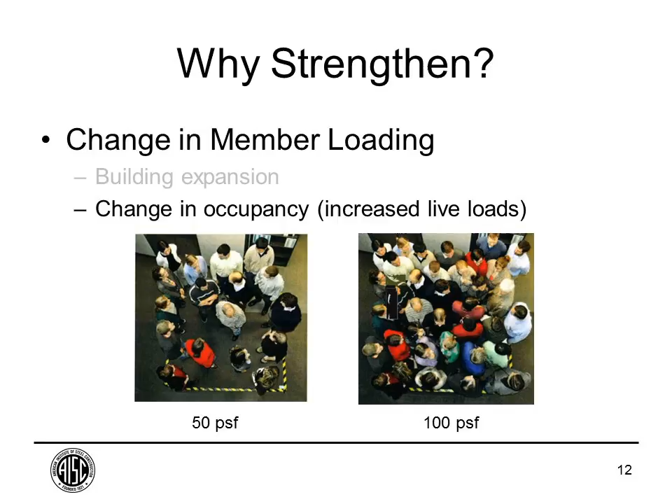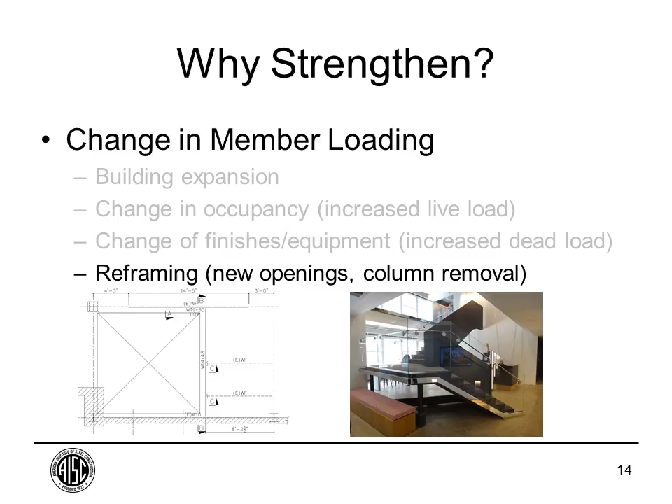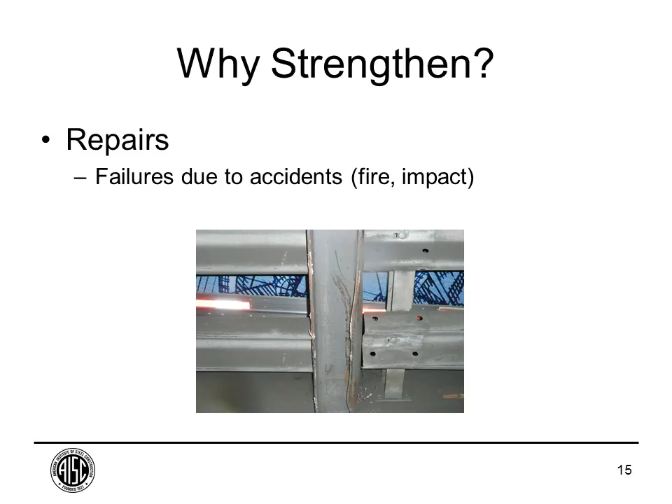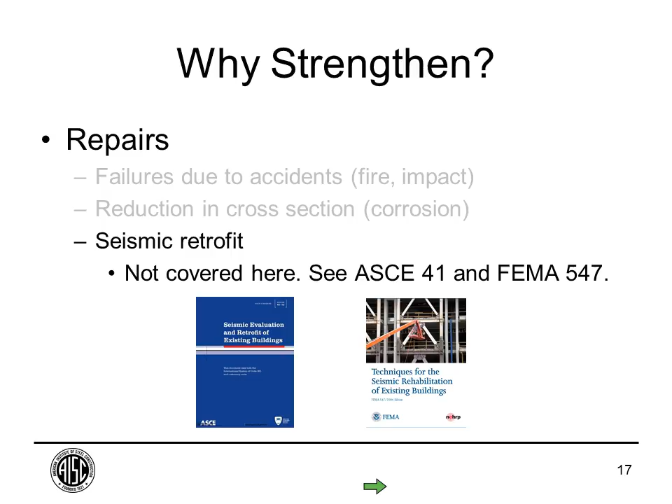And then a whole other category of strengthening would be seismic retrofit. I'm not going to have time to cover that topic here today, but many of the theories and the design provisions that I'll go over can be used and applied to a seismic retrofit as well. I've listed here two references that cover that material, ASCE 41 and FEMA 547.

So I'll talk just briefly about the International Existing Building Code, which is a code that is governing in a lot of places in the United States, and a few sections that pertain specifically to strengthening of existing gravity members. The IEBC classifies work into three categories: repairs, additions, and alterations, which are subdivided into three different work classes depending on the scope of work.

For repairs less than substantial structural damage, the damaged elements shall be permitted to be restored to their pre-damaged condition. Substantial structural damage is defined as vertical elements of a lateral system that are reduced by more than 33%, or vertical gravity members that support 30% of the building and are reduced by more than 20%. So even though something like this may look like substantial structural damage, vertical load-carrying members such as columns that are substantially damaged would fall under that category. The IEBC therefore would allow you to just restore the original size of this member when performing repairs.

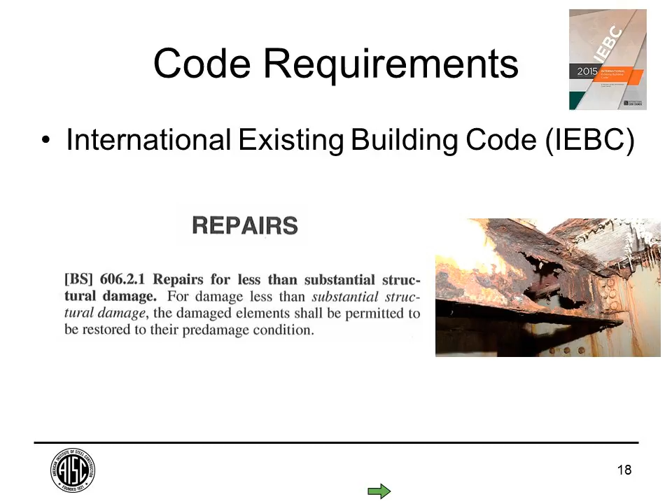Now, it's always a good idea to understand why the member failed in the first place, and make sure that your repair is addressing the cause of the original failure where appropriate. So for example, if this beam is getting wet, causing the corrosion, you would want to make sure that your repair design prevents that from happening again.

Another category of work in the IEBC is additions, which is defined as an increase in floor area, number of stories, or height of a building or structure. The code says that the existing structural elements supporting any additional gravity load as a result of additions shall comply with the International Building Code. But there's one exception: structural elements whose stress is not increased by more than 5% don't have to meet this requirement. So when you're looking at a member that is affected by your addition, if the load to that member is increasing by less than 5%, then you wouldn't have to do anything. But if it's more than 5%, then the existing member would need to be designed to the International Building Code. That means using the current loading requirements and strength provisions of the IBC.

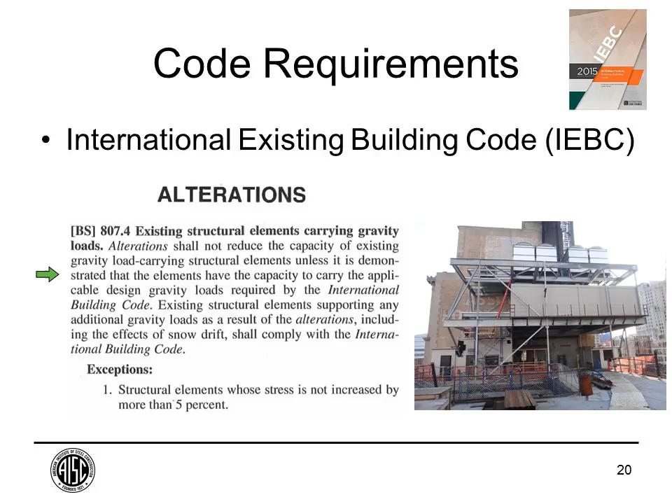And then the third category of work is alterations, which is basically anything that's not a repair or an addition. And basically the same provision applies, that any element where the loads are increasing by more than 5% needs to be designed to the International Building Code. And there's also an additional provision that alterations cannot reduce the capacity of the load-carrying structural element unless it is demonstrated that the elements have the capacity to carry the applicable design load.

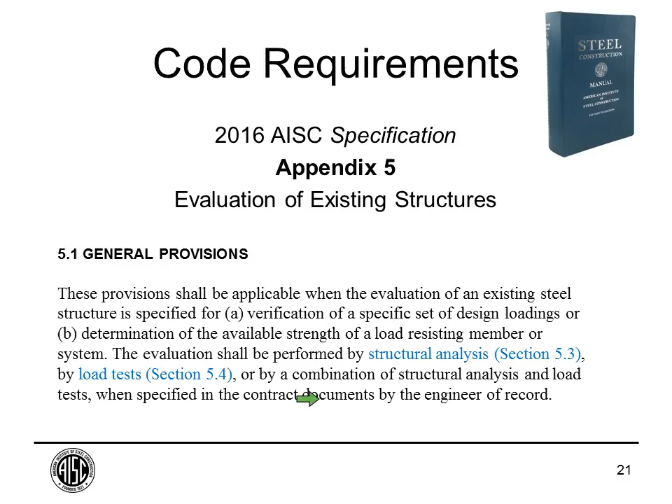In terms of code provisions that are applicable specifically to steel, you'll want to be familiar with Appendix 5 in the AISC specification. It's in the back of the spec. It's about 5 or 6 pages long. That contains some specific guidelines on how to evaluate existing steel members. And basically it gives you two options for doing that analysis. You can do it either by structural analysis or by load test, or a combination of the two.

So if you're doing the evaluation by analysis, you're going to need to determine the material properties and the dimensional information, specifically the cross-sectional properties of your historic steel shape, and then you'll determine the available strength using the current AISC specification. So if the historic member is adequate for this analysis, then you don't need to strengthen. If it's not adequate, then you'll need to design strengthening, and we'll talk about some ways to do that.

Now, the other option you can do is load testing. This is very rarely done because evaluation by analysis is typically much cheaper. Usually it's easier to do a field survey, review the drawings, and determine the strength that way rather than loading the structure and installing instrumentation in order to perform a load test. But in some situations, for example, if you think there may be some additional strength in the structure that you can't account for through analysis, you may want to do a load test.

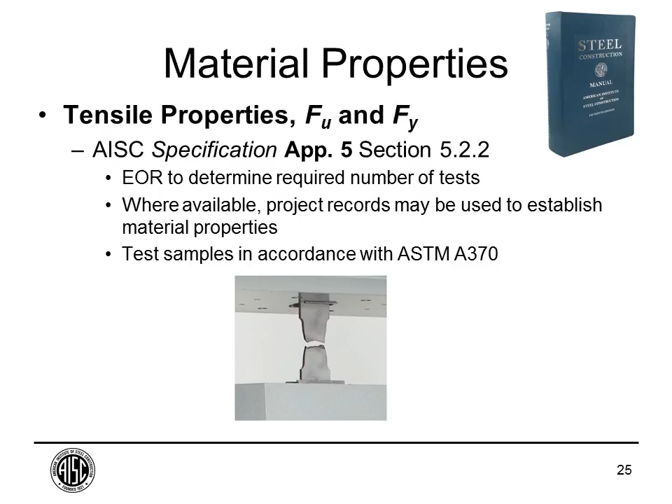If reliable records are not available, then you'll need to take steel coupons from the existing building and pull test them in accordance with ASTM A370. So typically those samples are taken from an area of low stress in a member. So typically that would be from the flanges near the ends of an existing beam. And when you're taking these samples, you're typically not looking to get a statistical sample, a large number of samples, and then calculate a minimum F sub Y. You're taking just a few samples and then trying to match your results to a material, a historic specification that are available in Design Guide 15, and then use the minimum FY and FU of those specifications.

So when you're trying to determine the tensile properties of the steel, just knowing the year of the original construction can be very helpful, and knowing something about the history of different types of steel. So the first structural steel specifications, A7 steel for bridges and A9 steel for buildings, came out in 1901. Those steels had a minimum tensile strength of 55 KSI and a minimum yield stress of half of the tensile strength. In 1939, the A7 and A9 specifications were merged. And then in the early 60s, A36 steel was introduced and became more prevalent. And then beginning in the 1970s, grade 50 steels became more common.

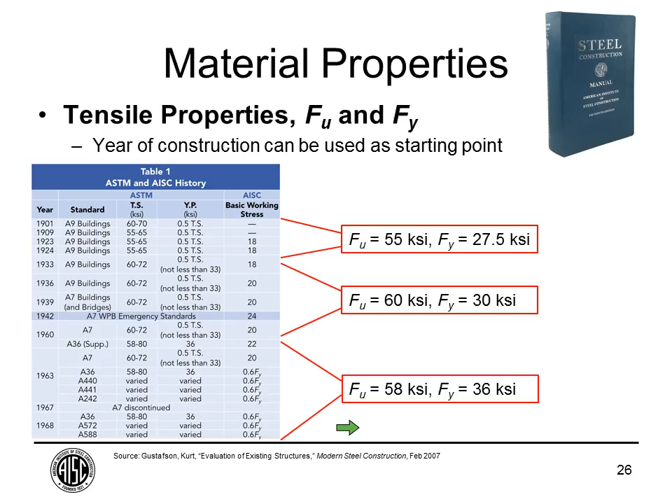So other than the tensile strength, the other thing you're going to want to know about your existing steel is whether or not it's weldable. As we'll see from the strengthening examples, you'll often need to weld to the existing steel in order to strengthen the members. So the first thing to do when you're working in an existing building is to look around and see if any of the existing connections utilize welding. If they do, that's a pretty reliable indication that the existing steel is weldable. Most steel buildings built after about 1963, when A36 became more prevalent, are generally weldable, but steels before that, it depends.

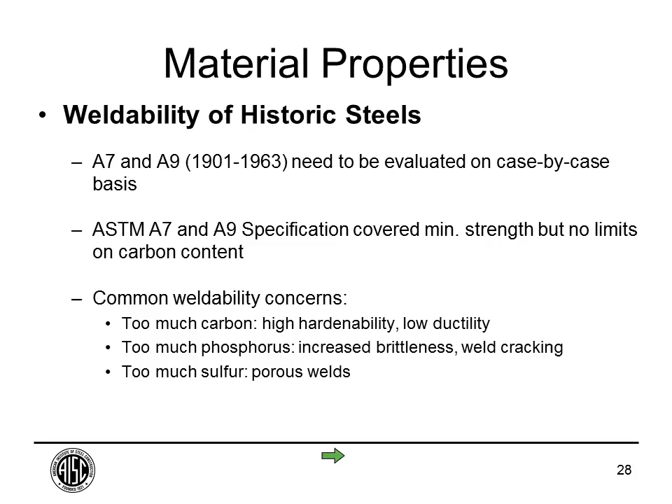So if you have a carbon equivalent value of about 0.45 or less, then it can be welded using standard procedures. With a carbon equivalent value higher than that, in the range of 0.45 to 0.6, it may be possible to weld to it, but you'll need to preheat the steel. Preheating the steel will slow the rate of cooling and reduce the risk of cracking.

One way to test your welds, if you're unsure about the quality, is to do what's called a tab plate test. To do that, you take a 1/4 inch by 2 inch by 2 inch plate and install a 5/16 inch fillet weld on one side, and then hit it with a mallet. If the steel bends and the weld fractures through the weld, that's an indication of a good weld. If the weld fractures at the interface between the weld metal and the existing steel, that's a sign that your steel is probably not weldable and it's not a good weld.

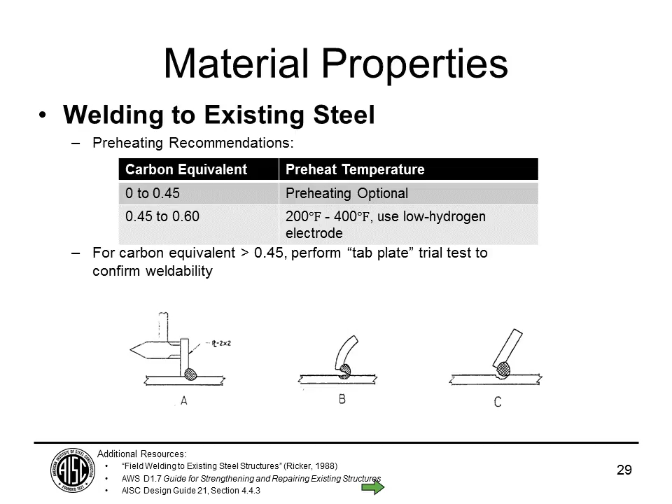Something else to consider when welding to existing steel is that when you're welding to a loaded member, the steel is going to lose strength when it heats up, because the welding is going to create temperatures in excess of about 650 degrees where steel begins to lose strength. I'll talk about this in more detail when I talk about strengthening loaded columns, but it really needs to be thought about carefully in that case.

In general, as a result, you'll want to design welds that limit the heat input into the steel. To do this, you'll want to design your reinforcement to use fillet welds instead of groove welds. Use the smallest weld size that's adequate for the loads. As engineers, often we'll just bump up the sizes of members and connections in order to provide additional factor of safety, but that may have detrimental effects if you're welding to a loaded steel member.

You'll want to use intermittent welds wherever possible to limit the total amount of welding. You'll want to try and avoid overhead welding because this will result in a slower deposit rate. It's not always possible to avoid it, but you should avoid it when you can. The slower deposit rate will cause the steel to heat up over a greater area. And you want to avoid welding across stress lines.

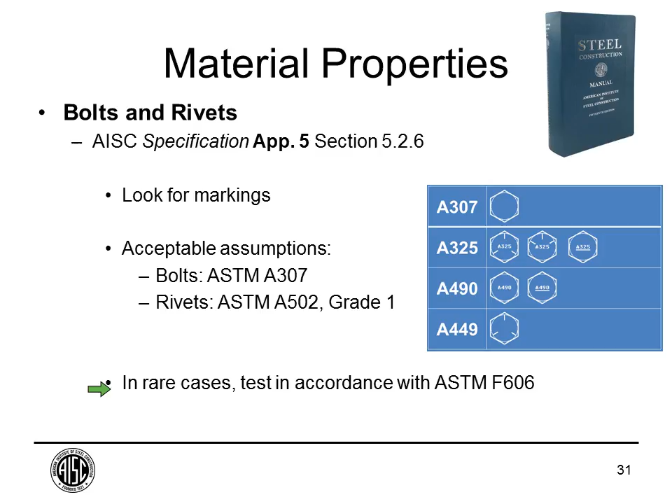In the absence of information, Appendix 5 allows you to make some conservative assumptions about the materials for bolts and rivets. For bolts, you can conservatively assume A307, and for rivets, ASTM A502 grade 1. Typically it's easier to make these conservative assumptions rather than trying to remove bolts and rivets and test them in a lab. But if you needed to do that, you would test in accordance with ASTM F606.

After you have your material properties, the other piece of information that you're going to need in order to do your evaluation is dimensional information. This includes things like spans, column heights, bracing locations, and most critically the cross-sectional properties of historic members. Again, it's very important to try and look for existing drawings because they're going to help you a lot if you can find them.

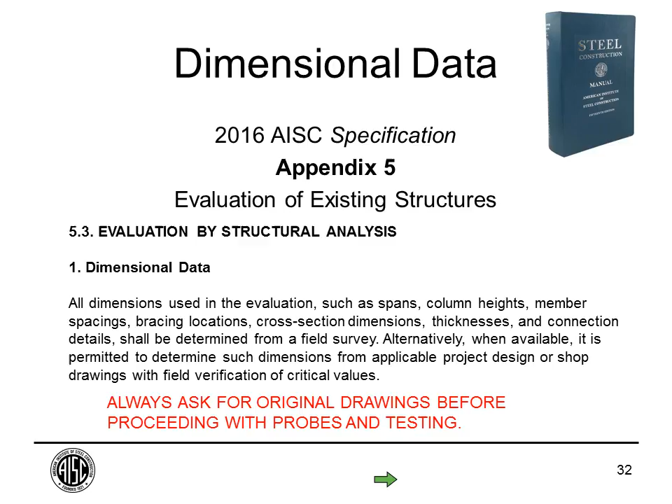If you don't have drawings, then you're going to need to do probes in order to determine the dimensional information that you need. It's also a good idea, even if you have drawings, to take a few dimensions in the field in order to confirm the accuracy of the drawings that you have. To determine a beam or column size, typically you'll need to just measure the beam depth, the beam flange width, and the flange thickness. Then you can take that information and find a section in Design Guide 15 in the tables there, and get the cross-sectional properties that you need for your analysis.

When you're out in the field doing your field survey for the existing members, it's also a good idea to measure slab thickness and get other information that you need in order to accurately determine dead loads and other similar things.

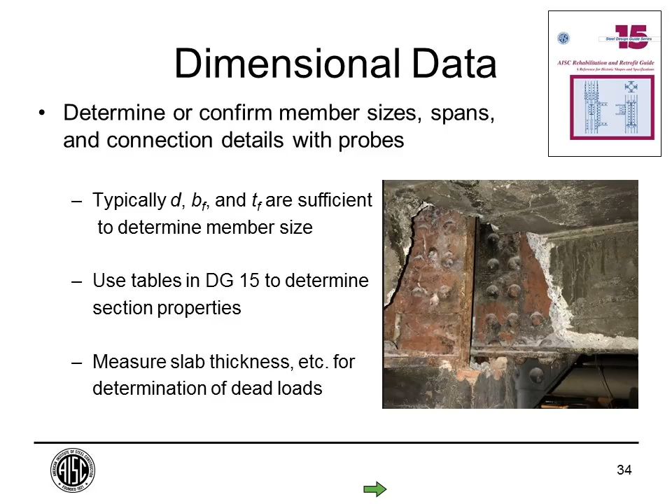So as an example, if you're measuring a beam out in the field, your field notes might look something like this. You'll get the flange width, the flange depth, and the flange thickness. Flange thickness, you'll want to take a couple measurements, one at the tip of the flange and another one closer to the fillet. As historic shapes, a lot of them have sloped flanges, and the historic tables will give you an average flange thickness.

So this is a printout from a table in Design Guide 15. You take the dimensional information that you got from the field, match it up with the shape in the table, and then from that same line you can get the cross-sectional properties that you need in order to do your analysis. You also want to cross-reference the source reference number, which is listed in these tables in Design Guide 15, and make sure that the beam you've found that you think matches what you measured in the field matches up in terms of the year that your building was built and the year that the historic shape database is from.

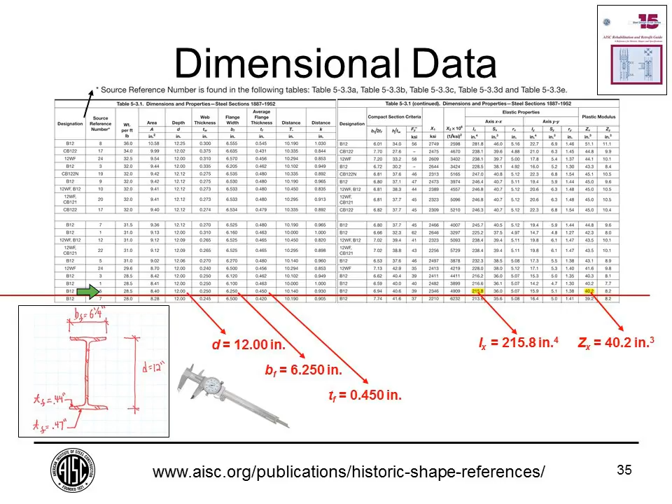So again, the general design procedure, this time just looking at the evaluation by analysis and not the load testing. You'll calculate the load effects using the current code, and determine the material properties through a combination of reviewing project documents and doing testing. You can determine the dimensional information that you need from the tables in Design Guide 15, and then you evaluate the strength using the current AISC specification. If the strength is okay, then you don't need to strengthen. If it's inadequate, then you'll have to proceed with designing strengthening.

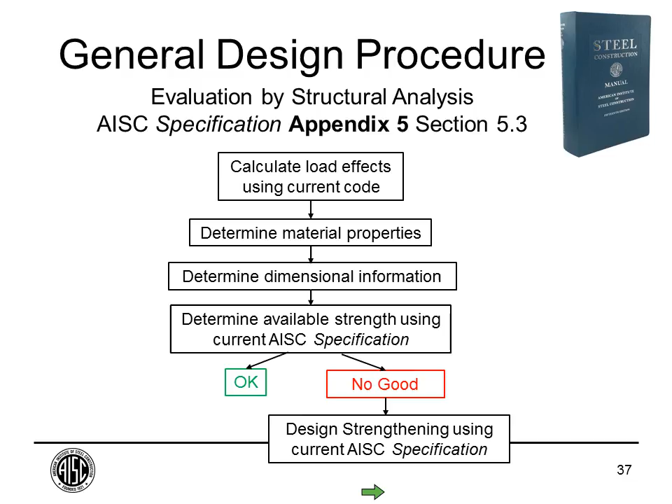So let's do a quick example looking at strengthening of an existing beam. In this example, we have an existing beam, a W12x16.5. It's spanning 20 feet and has a factored load on it, using LRFD, of 1.29 kips per foot. The building was built in 1965, and we know from the project documents that they used A36 steel.

We're going to assume that the beam is fully braced for lateral torsional buckling, braced by the slab, and we're going to evaluate the beam and design strengthening as required using a welded plate at the bottom flange. So from the load, we can calculate wL squared over 8, the flexural demand of 64.5 kip-feet.

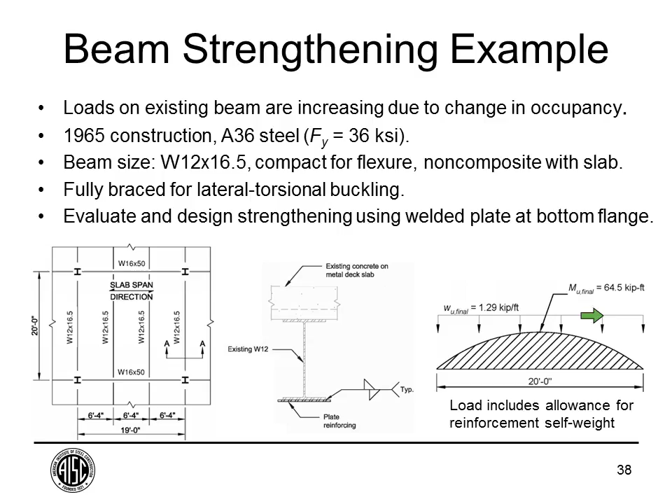So from Appendix 5, we're going to evaluate the beam using the equations of the current specifications, not trying to use the allowable stress provisions from a historic specification. The idea here is that we want to use the latest and greatest in terms of determining strengths of members and take advantage of all that we've learned from research about steel strengths when we're evaluating historic members.

So for this particular problem, the nominal strength is just equal to the plastic moment, since lateral torsional buckling is not applicable. So F sub y times the plastic section modulus. We know our moment demand, we know F sub y, so we can solve directly for the plastic section modulus that we need, and we get a value of 23.9 inches cubed.

And then if we take a look in Design Guide 15 for this historic shape, we can get the relevant geometric properties for this shape. Taking a look at that table, we see that the existing beam has a plastic section modulus of 20.6 inches to the third. So that's less than the required plastic section modulus, so we're going to need to reinforce this beam.

So the existing beam is overstressed by approximately 16%, so we'll need to design reinforcing that increases the plastic section modulus from 20.6 inches cubed to 23.9 inches cubed. Now before proceeding with strengthening, it's always a good idea to try and sharpen your pencils and make sure that you're not being overly conservative with any of your loading or your analysis.

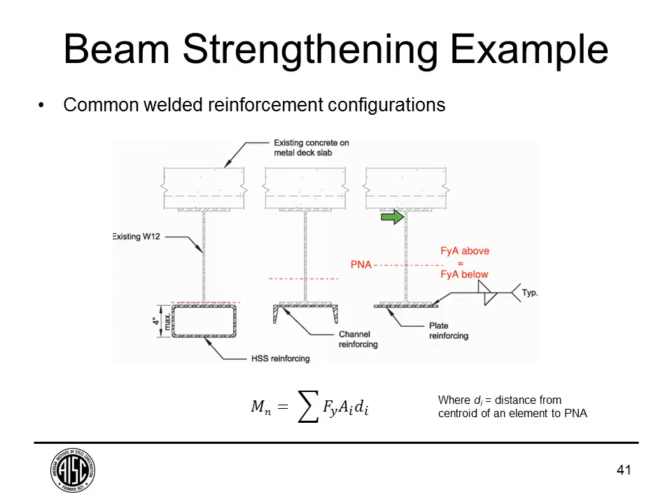In order to evaluate the flexural strength of the member, you'll have to find the plastic neutral axis, which is located where Fy times the area above the plastic neutral axis is equal to the Fy times the area below, and then the nominal moment strength, flexural strength, is equal to the summation of the Fy times A times d, where d is the distance of one of the parts of the beam broken down into rectangles from the plastic neutral axis.

Some other common configurations for welded reinforcing. To get a more symmetric reinforcing, where possible, you may want to put a plate on the bottom and the top. If you have a slab on top, you could look at welding plates to the underside of the flange. For cases where torsional loads or lateral torsional buckling are applicable, you'll want to look at creating closed shapes with your reinforcing. So this can be done by adding plates between the flanges or angles to either the bottom flange or the top flange or both.

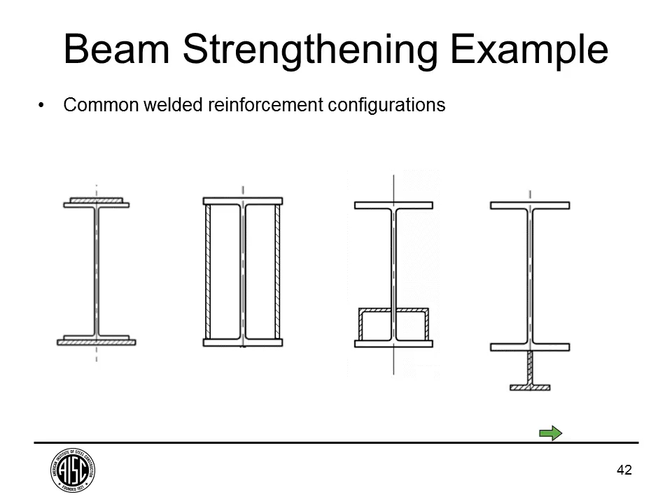And then a very common reinforcement technique is to add a WT shape to the bottom flange. This will add quite a bit of area away from the neutral axis, which can be effective in drastically increasing the flexural strength of the member. One thing you'll want to look out for with some heavy WT shapes, you want to make sure that the flange of the WT is not so wide that you won't be able to weld. And I guess the downside of the WT configuration is that you have to use overhead welding. But sometimes it's necessary for beams that need to be strengthened quite a bit.

So to do our analysis, we'll be using the provisions of the current specification. And I'll discuss here briefly the problem with using an allowable stress approach from an old code. So when I say allowable stress, I'm talking about using the provisions of a historic specification where steel was typically designed by looking at the elastic stresses in the beam and then limiting them to a value typically either 0.6 or 0.66 times Fy. So if we were trying to reinforce this beam using this approach, we would need to keep the elastic stress below 0.66 times the yield stress, or 23.8 ksi. In order to do that, we would need to consider the history of the loading.

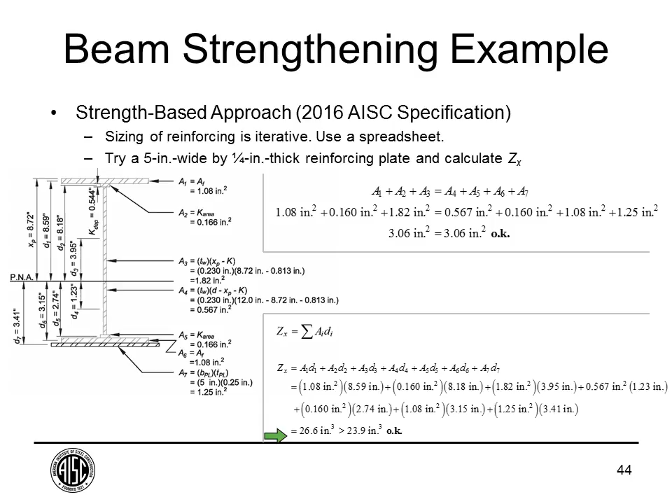And then once you've found that, you can find the plastic section modulus by just summing up the areas of those different rectangles times d, which is the distance between the centroid of that rectangle and the plastic neutral axis. If we do that, we find that this reinforced section has a plastic section modulus of 26.6 inches cubed, which is greater than the 23.9 that we needed.

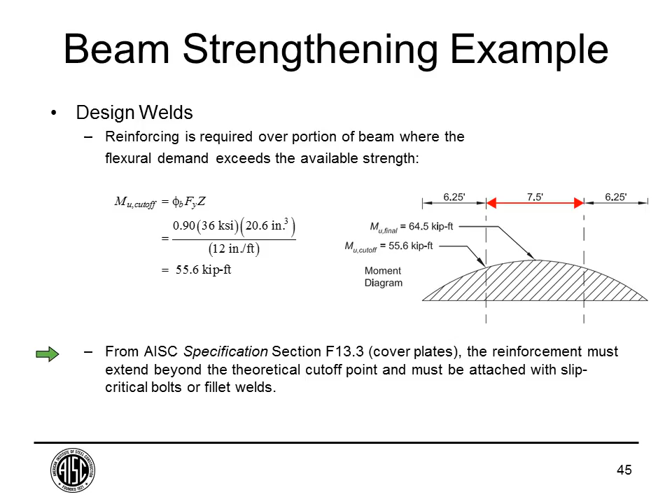And then section F13.3 has some prescriptive requirements for cover plates, and it says in the code that the reinforcement must extend beyond the theoretical cutoff point and must be attached with slip-critical bolts or fillet welds. So in order to design the termination welds at the ends of our reinforcing plate, we're going to use the yield strength of the plate, and that comes from the commentary of section F13.3. The yield strength of the plate is just equal to the yield stress times the area, so we get a value of 45 kips.

And then we can solve directly for the length of a 3/16 inch fillet weld that we need in order to develop that force. So our force is 45 kips. We have welds on both sides of the plate, 2 welds, and the strength of a 3/16 inch fillet weld is 4.18 kips per inch. So we can solve directly for the length of the weld as 5.38 inches, and we'll round that up to 6 inches.

There's also one prescriptive requirement in section F13.3 for cover plates, and it says that the cover plate termination needs to be at least a length of A prime. If you provide a continuous weld equal to or larger than 3/4 of the plate thickness across the end of the plate, then the length of the termination weld needs to be at least as wide as the reinforcing plate.

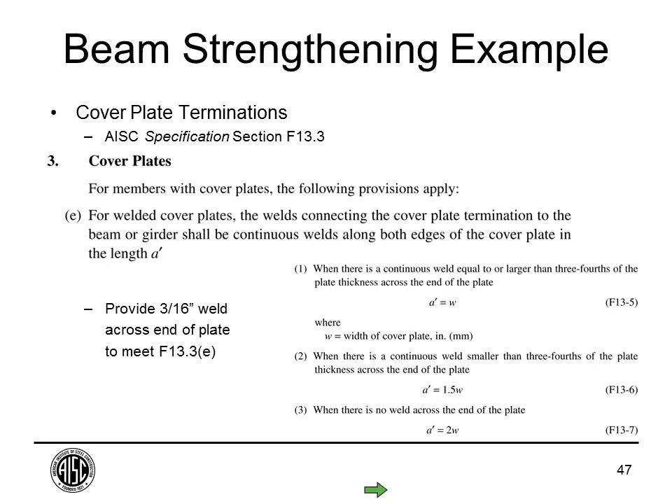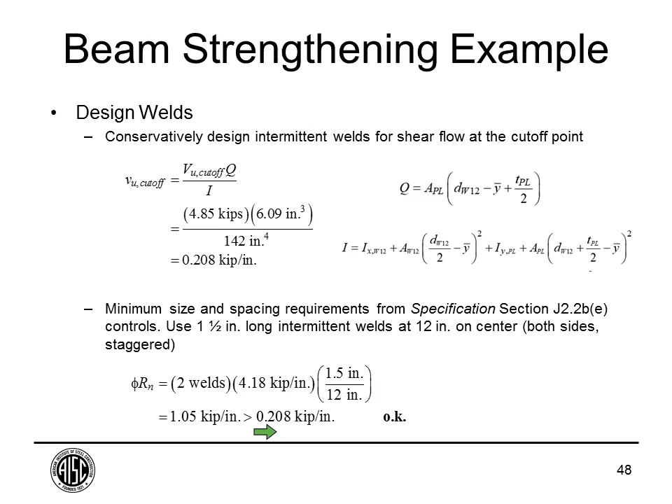The centroid is not the same thing as the plastic neutral axis. So from this equation, we find that we have a shear flow of 0.208 kips per inch. So we need to design our intermittent welds between the terminations for that force. From specification section J2.2b, part E, it gives us some minimum requirements for weld sizes of 1.5 inches long. So we'll consider 1.5 inch long intermittent welds at 12 inches on center, both sides staggered. We calculate the strength of that weld. We get a value of 1.05 kips per inch, which is quite a bit greater than the required strength.

So some other checks that you'll want to do when looking at a beam, you should check the shear in the unreinforced beam. Typically that doesn't control, but again you would do that using the equations in the current specification. You'll need to evaluate the existing connection if you're increasing the load to it by more than 5%. I'll go through an example of how to do that and how to design strengthening if needed. You'll want to check the entire load path of your system. If you're increasing the loads throughout the whole slab, you'll need to also make sure that your slabs are adequate, the girders are adequate, the columns, if you're increasing your load to them substantially, may need to be evaluated as well. And then lastly, you'll want to take a look at deflection.

So for deflection, unlike the strength where we ignored the loading history, for deflection you'll need to consider the loading history. So you'll have some deflection component that occurs before the reinforcing is installed, and then an additional deflection component that occurs from the superimposed dead loads and live loads that are applied after the reinforcing is installed. And in order to determine those deflections, you'll want to create a simple computer model with a step section that has the unreinforced moment of inertia along the ends, and then the reinforced moment of inertia along the reinforced portion of the beam. So typically if your deflection criteria is meant to limit damages to finishes, then you're probably only interested in considering the deflections that occur after the reinforcing is installed.

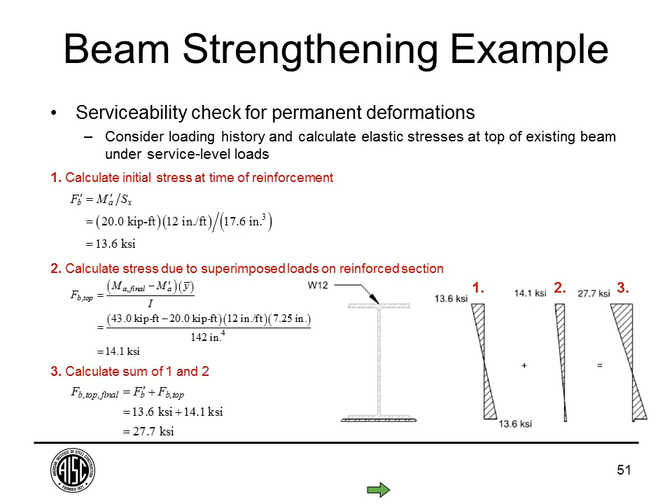If you did have a case where the stresses at the top of the beam were approaching yielding or exceeding them, you may want to think about trying to jack some of the load out of the existing beam before installing the reinforcing. So how this is done is the reinforcement is laid up but not welded to the beam. Then you would jack some load out of the existing beam, and then once that's done, you can weld the reinforcing to the existing beam. So that will help to reduce the overall deflections and also the elastic stresses at the top of the beam.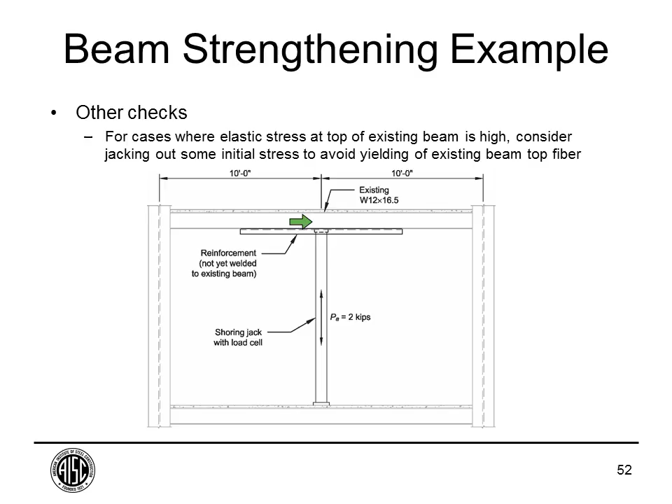So that's it for our example. I'll talk about some other situations that you may come across. The beam we looked at in our example was a non-composite beam. If you had a beam that was composite with a slab with shear studs, the approach for designing strengthening would essentially be the same, except you'd have an additional internal force in the concrete in compression. So again, the approach is basically the same.

You're going to break your section down into equivalent rectangular sections. Find the plastic neutral axis. In this case, the plastic neutral axis is going to be located where the internal forces above the line are equal to the internal forces below the line, the plastic neutral axis line. And then once you have those internal forces calculated, you can find the flexural strength, which is equal to the sum of these forces times their distance from the plastic neutral axis.

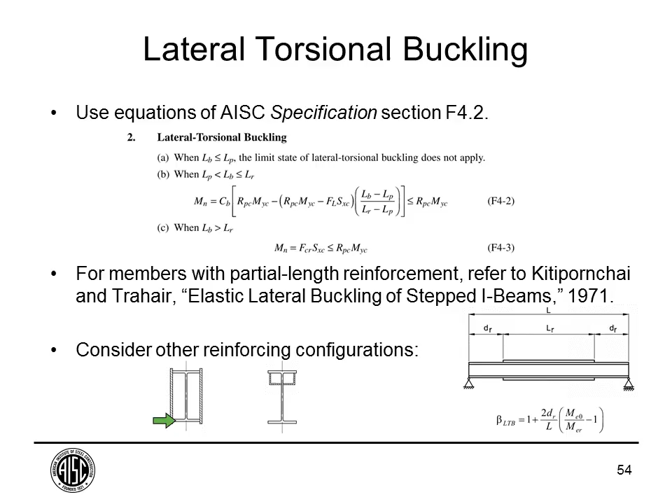In cases where lateral torsional buckling is a consideration, you'll need to use the equations of specification section F4.2 for singly symmetric shapes if you're using a single plate reinforcing detail. It can be a little bit cumbersome, but it's definitely doable. If you're looking at a beam where you have lateral torsional buckling or applied torsional loads, and you're only reinforcing across a portion of the member, you'll want to take a look at this paper, as the equations for that become even more complicated. And also, if you have a beam where torsion is a consideration, you'll want to consider using one of these reinforcing configurations where you're creating a closed section that's more resistant to torsional loads.

So, some other strengthening schemes that you can consider. If you have a beam framed with these W12s, instead of trying to reinforce those members, you could look at adding new beams between the existing beams. So if you do this, your design will have to consider the loading history, because the new beams are only going to be able to resist loads that are applied after they're installed.

And then you also want to consider the effects on the existing slab. So in one sense, you're benefiting the slab by reducing the span by half in this case, but you may be introducing negative moments above your beam, which could cause cracking in the slab. So that's something you'll definitely want to think about. And then you'll also need to consider how these beams get installed. In order to avoid the flanges of the girders, they may need to be spliced in the air or have long connection plates at the ends.

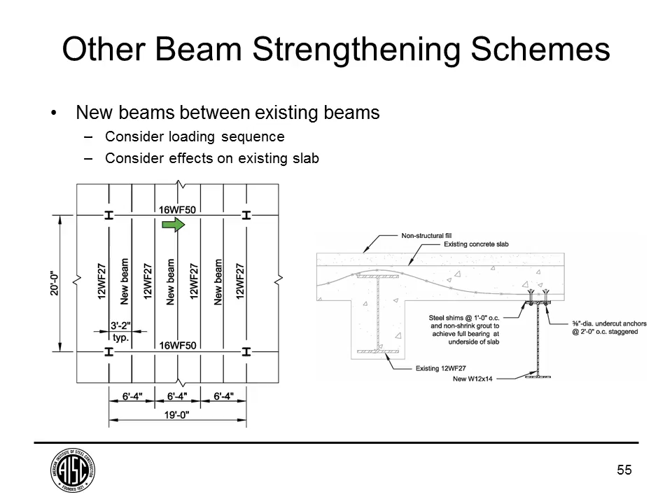So that reinforcing scheme would address the beams but not the girders. One way to reinforce girders, if you don't want to weld reinforcement to the bottom of them, if you want to limit the amount of field welding, is you can just install a new member directly below that existing member and then shim it directly to the underside but not weld to it. So in this case, again, it will reduce the amount of field welding, but you'll need to consider the loading

sequence, as the reinforcing beam is only going to take loads that are applied after it's installed, obviously, but also it'll only take loads in proportion to its relative stiffness to the existing beam. So this reinforcing scheme, while it reduces the amount of field welding, you'll still need connections at the end to connect to the columns, and it's limited in where it can be used because of the headroom restrictions that it imposes. But you may be able to use it in some cases in spandrel conditions or similar.

Another option for reinforcing existing framing is to introduce new columns to basically reduce the span of the beam. So if you introduce new columns, you'd probably also need to introduce new footings. In this particular case, you could also look at using diagonal posts, which wouldn't need a new footing. These posts would essentially help to limit the span of the existing member. You'll need to again consider the loading sequence, as the posts are only going to be taking loads applied after the posts are installed.

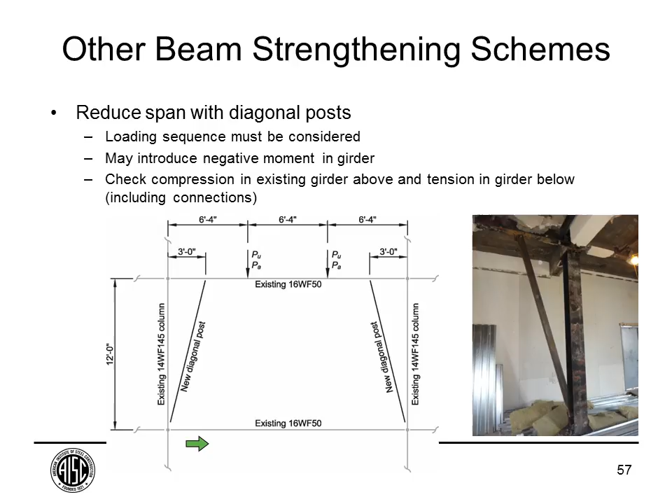Another strengthening technique that is pretty elegant when it can be done is to add shear studs. If you have an existing beam and a concrete slab, and the beam is not composite or not fully composite with the existing slab, then you can add new shear studs that introduce composite action. This is done by creating discrete cores through the existing slab. You have to be very careful not to damage the top flange of the existing beam. Also, you'll need to be very careful about controlling the water that's used during coring. Make sure that it is not going to damage the space below. But if you can do this, then it's usually a good solution, because you don't need to have access to the underside. The strengthening can be done from the top side.

You'll need to also think about, if there's reinforcing in the slab, what the coring is going to do in terms of the slab strength. And then once the studs are installed and inspected, you would come back and fill the cores with non-shrink grout in order to restore the continuity with the existing slab.

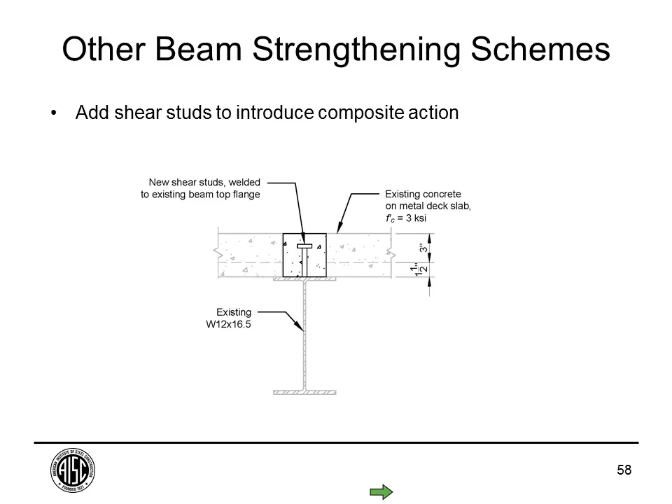So in most of the strengthening schemes that I've discussed so far, except for the shear stud, you're going to need access to the bottom side of the existing beam. In some cases, that may not be possible. Your floor is the floor above the beam. In a lot of cases, you may not be able to access the beams below because there's a different tenant, or perhaps it's the lobby. So you may need to try and reinforce from the top side.

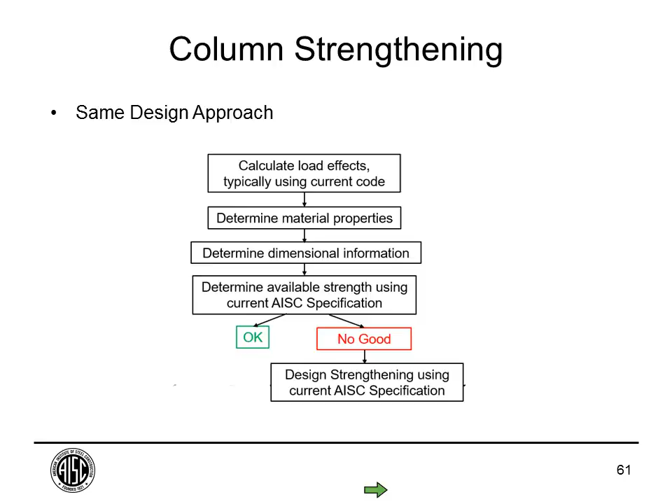So typically, columns are reinforced similar to beams by using welded plates. Wherever possible, you're going to want to use a symmetric reinforcing configuration so that your column section remains doubly symmetric. By adding steel plates, you're going to be adding to the cross-sectional area and the moment of inertia, so that'll give you the additional strength that you need. So you want to use a symmetrical configuration wherever possible.

In some cases, it may not be possible to use a symmetrical configuration. For example, if you have a column that's embedded in a wall and you only have access to one flange, you could try a reinforcing scheme like this, but you'll need to be very careful about doing that because if you're welding on only one side, you have the potential to create welding distortions that are going to introduce P delta effects into your column.

So when we were looking at reinforcing beams, this wasn't much of an issue because welding to the bottom side is only going to help in terms of the overall deflections, but for columns it can really create some problems. So if you're going to be using a single-sided asymmetric reinforcing configuration, you're going to want to quantify what this distortion is and make sure you've accounted for it in your analysis. So I recommend referring to this reference here, Design of Welded Structures, which has some equations for quantifying this welding deformation. And even for symmetrically reinforced columns, this is something you'll want to think about because if the two welded plates are not installed at the same time, you could have this deformation temporarily.

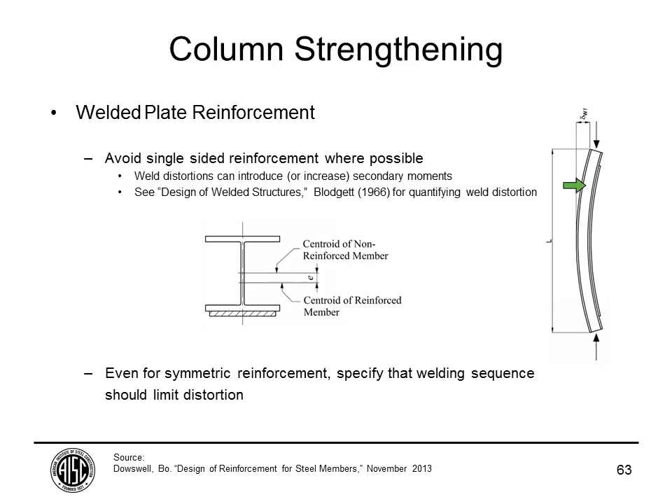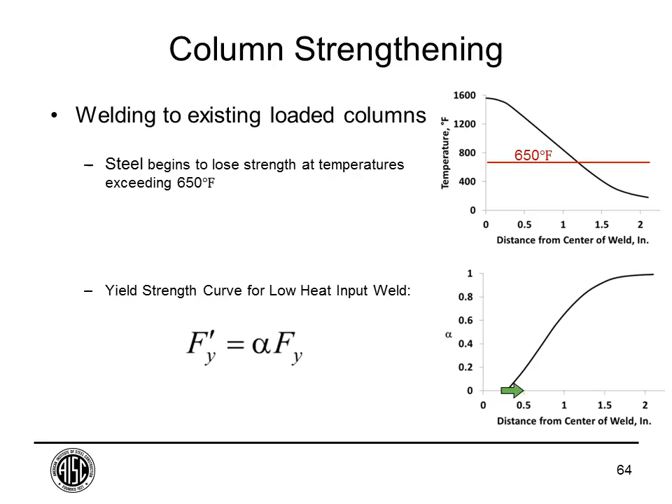So how this is typically dealt with in design if you're welding to a loaded column, is you consider the area within an inch or two of the weld to be ineffective or inactive, basically no strength in that area, and then evaluate the remaining section and make sure that that is still adequate for the loads, not the final loads, but the loads that are present at the time of welding. And again, you'll want to follow these general guidelines in order to try and limit the heat input to the existing steel.

And then one last thing to consider when looking at columns is the preload, which is the load in the column at the time of strengthening. So when we looked at beams, we ignored the loading history. And it turns out for columns that you can do the same thing where you ignore the load that's in the column at the time of strengthening, provided that the reinforcing is stabilizing. And what's meant by that is that the least radius of gyration of the reinforced column needs to be equal to or greater than 85% of the radius of gyration of the unreinforced column. So this finding was found through physical tests of reinforced columns and finite element models.

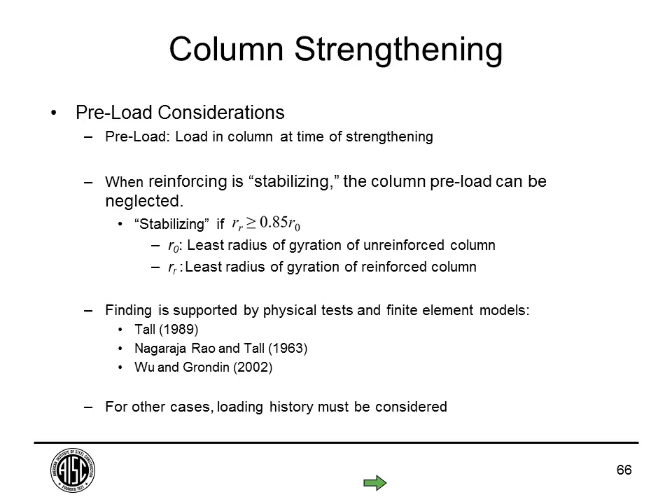If you want to read up more about it, you can take a look at these references that are listed in detail at the end of the presentation. So if you have a case, in most cases, if you're reinforcing the column, this criteria is going to be met. But in rare cases where it's not, you would need to consider the loading history, where the reinforcing plates are only going to take the load applied after the reinforcing plates are installed.

So let's take a quick look at an example here. We have a column where the loads are increasing. The final applied load is 550 kips, factored load for LRFD. The existing column is A7 steel with a yield strength of 33 KSI. The column size is a 10 WF66. And we're going to evaluate this column for the applied load and then design strengthening.

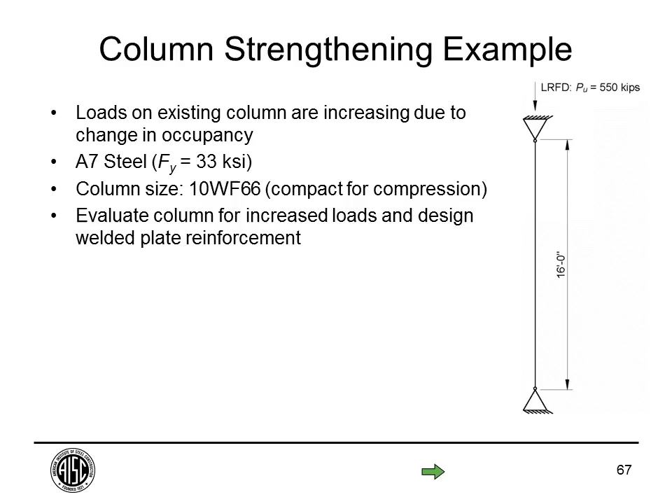We're not able to take a look in the manual table 4.1 to quickly determine the strength of this column because the historic shape is not listed there, and also the yield strength 33 KSI is not covered in the table. So we'll need to get the geometric properties from Design Guide 15. In particular, we'll need the area and the least radius of gyration about the y-axis, and then we can use the equations in specification Chapter E, Part 3 in order to determine the strength.

So the effective length for a pin-pin condition is just 1.0 times the length of 16 feet, or 192 inches. Then from equation E3-4 we can find the elastic buckling stress, which is equal to pi squared times E divided by the slenderness ratio squared, so we get a value of 51.6 KSI. And then we'd calculate the critical stress.

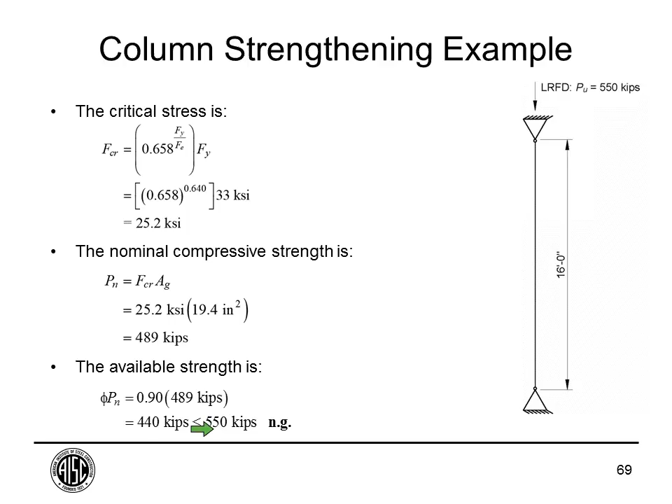Since Fy over Fe is less than 2.25, we use this equation from the specification and get a critical stress of 25.2 KSI. The nominal compressive strength is then equal just to the critical stress times the area of the unreinforced column, and we get a value of 489 kips. And then we multiply by the phi factor for LRFD of 0.9 to get an available strength of 440 kips, which is quite a bit less than the required strength of 550 kips. So the existing column is not adequate, and we're going to need to design reinforcing.

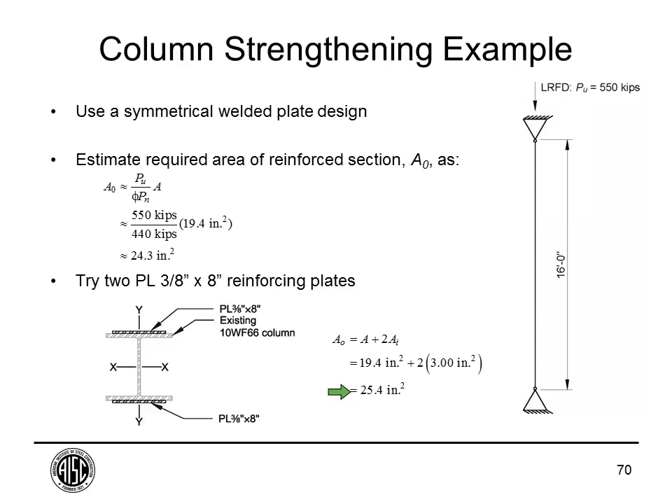So in order to design reinforcing, we're going to use a symmetrical welded plate design as a first estimate of the area of the reinforcing plates. We saw in the previous page that the existing column was overloaded by about 25%, so we're going to try and increase the cross-sectional area of the column by at least 25%. So if we provide two 3/8 inch by 8 inch wide reinforcing plates, that'll increase the area from 19.4 inches to 25.4. We'll need to check the slenderness ratio to see if it meets the requirement of Chapter B.

If we do that, we see that it does. If we didn't meet that criteria, you may want to consider increasing the thickness so you don't have slender plates as part of your column. And then in order to evaluate the strength of the reinforced column, we just need to calculate the section properties. So again, the moment of inertia and the radius of gyration of the reinforced section, which is just equal to the square root of I over A. And we get a value of 2.52, which is approximately equal to 2.58, which was the radius of gyration of the unreinforced section. So we meet the stabilizing criteria.

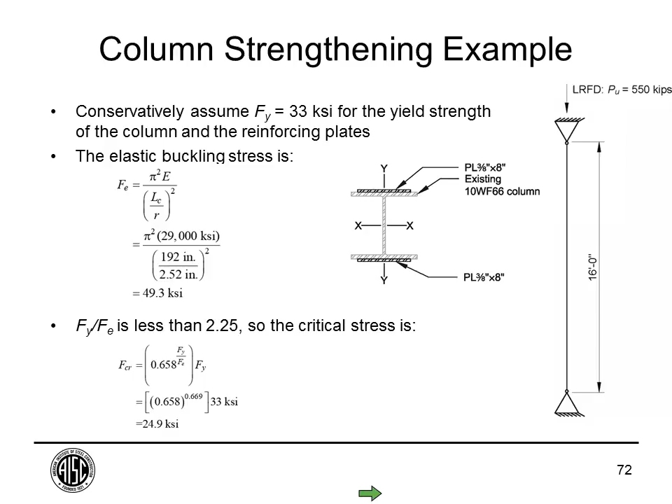So now we just need to go through the same equations that we looked at before, substituting in the section properties of the reinforced section. In this case, the original steel was 33 KSI, the plates are 36 KSI, so conservatively we're going to use 33 KSI for the full section. So the elastic buckling stress, using that same equation but substituting in the new radius of gyration, gives us a value of 49.3 KSI. The critical buckling stress is 24.9 KSI, and the nominal compression strength is 632 kips. Applying the phi factor, we get a strength of 569 kips, which is greater than the required strength of 550 kips. So this reinforcing design is adequate,

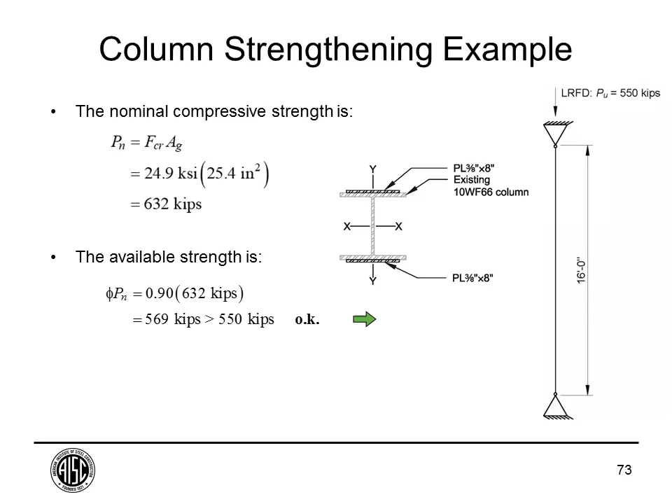and we just need to design the welds just like we did for the beam. So the requirements for welding the plate come from specification section E6 for built-up columns, which is applicable here. So again, we designed the termination welds for the yield stress times the area, or 108 kips. If we consider a 1/4 inch fillet weld, the required weld length is then calculated directly as 9.69 inches, where this 5.57 kips per inch is the strength per inch of a 1/4 inch fillet weld. So we'll round that up to 10 inches for our termination welds.

There are a couple of prescriptive requirements from section E6. This one limits the ratio between A, which is the distance between the intermittent welds.

The ratio between A over R has to be less than 40. And if it's not, then you need to use a modified slenderness ratio. Since we're pretty close to the capacity, we'll design our intermittent welds to meet that slenderness ratio capacity, so we can solve directly and find that we need to have an A, or a weld spacing, of 4.32 inches. So we'll use intermittent welds 1.5 inches long at 4 inches on center.

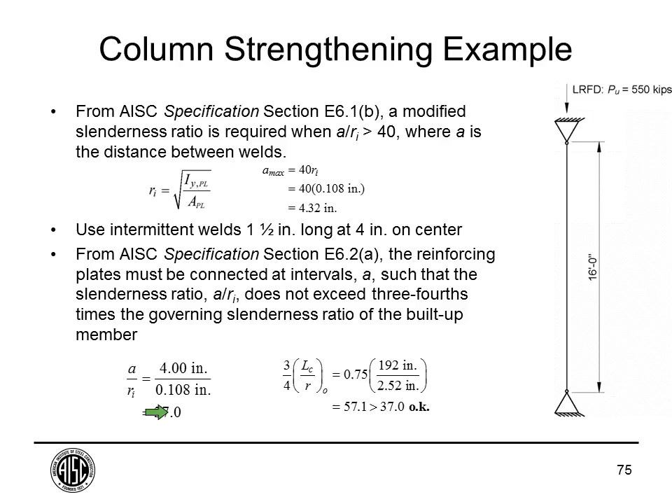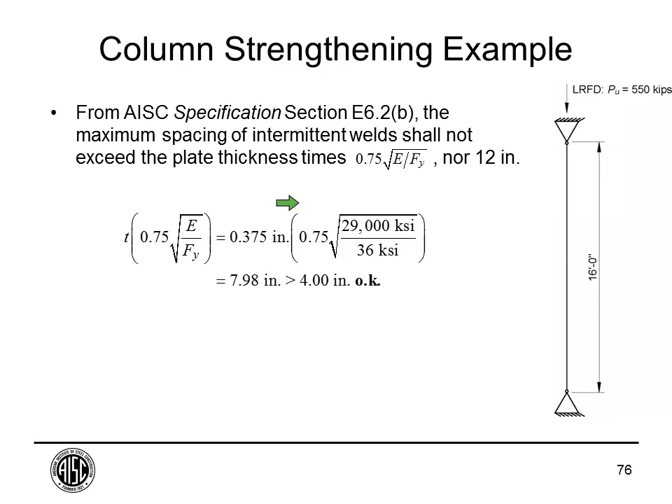And then another prescriptive requirement is that the A over R ratio cannot exceed 3/4 the governing slenderness ratio of the built-up member. So if we take a look at that, we find that we meet that criteria, so the 4-inch spacing is adequate. And then lastly, we have this requirement from section E6.2, which says that the intermittent welds shall not exceed the plate thickness times 0.75 times the square root of E over Fy. So if we plug into that equation, we find again that the 4-inch intermittent weld spacing is adequate.

So here's the final design. We have our 3/8 inch plates on both sides, 10-inch long termination welds, and then our intermittent welds 1.5 inches long at 4 inches on center. So this design is adequate, but in many situations it's going to be very difficult to install reinforcing plates like this. In most situations in buildings, you'll have beams or braces framing in at the floor levels, and you won't be able to install reinforcing plates over the full length of the column.

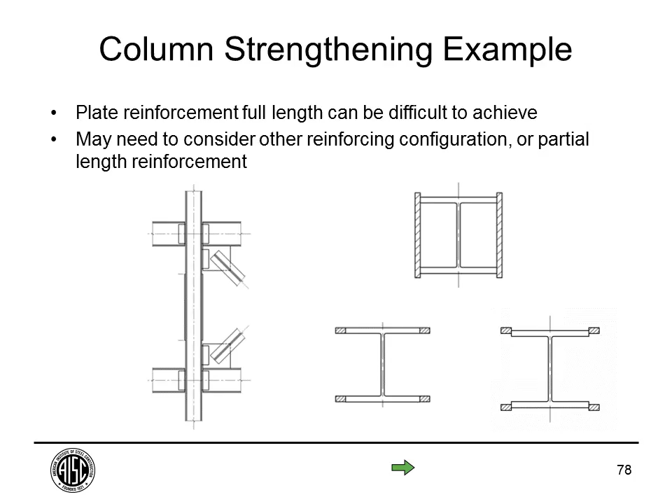So this can be dealt with in a couple different ways. One is to take a look at using different reinforcing configurations. For example, you could look at reinforcing using flange tip plates. These are typically offset a little bit so that you can weld them with fillet welds instead of groove welds. Another thing that you can do is look at reinforcing the column using plates only over a portion of the length.

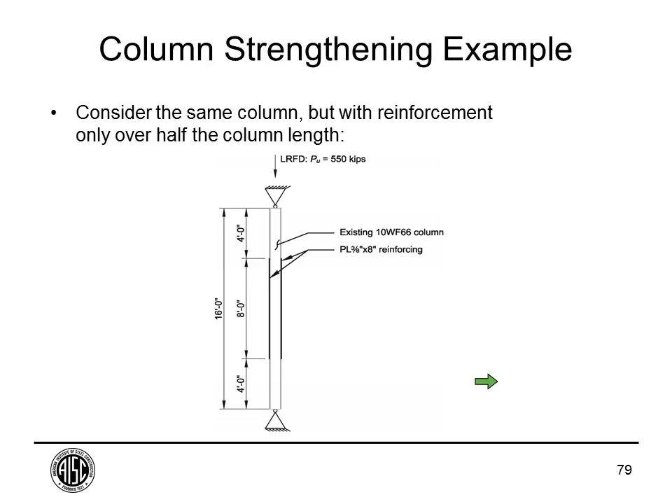So if we take a look at that same column, we're going to take a look at seeing what the strength would be if we had the reinforcing plates installed only over an 8-foot length, or half of the 16-foot length of the column. So in order to determine the strength of this, we're going to refer to this paper by Dalal called Some Non-Conventional Cases of Column Design from 1969. In this paper, the author tabulates the strengths of different columns with step geometries, which is equivalent to what we're looking at here with the reinforced section.

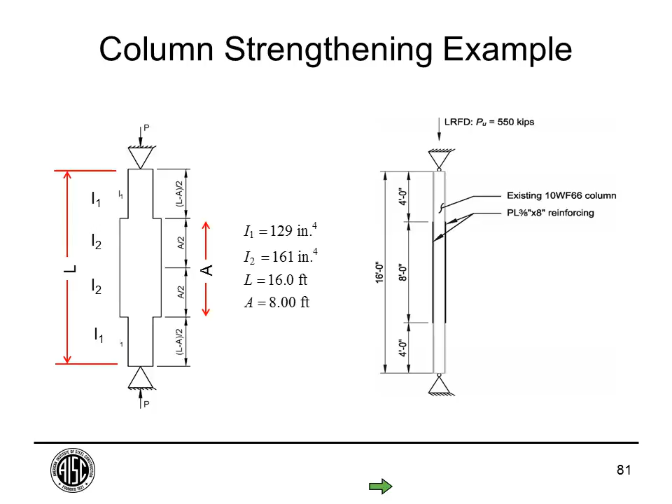So all we need to know to go into the tables is the ratio between the moment of inertia of the unreinforced section and the reinforced section, and then the ratio between the overall length and the reinforced length. They use the variable A for the reinforced length, which can be a little bit confusing. It's not an area, it's a length. So for this problem, our ratio A over L is equal to 0.5. The reinforced moment of inertia compared to the unreinforced gives us a ratio of 1.25.

So going into those tables, we can get the value for the effective length over the original length. We'll interpolate between 1.2 and 1.3 to get a value of 1.02. So then we multiply our original length by that number to get an equivalent length of 16.3 feet. So basically what this is saying is that if we reinforce the column over only the middle half, then we have the same strength as a column that's 16.3 feet long, reinforced over the full length.

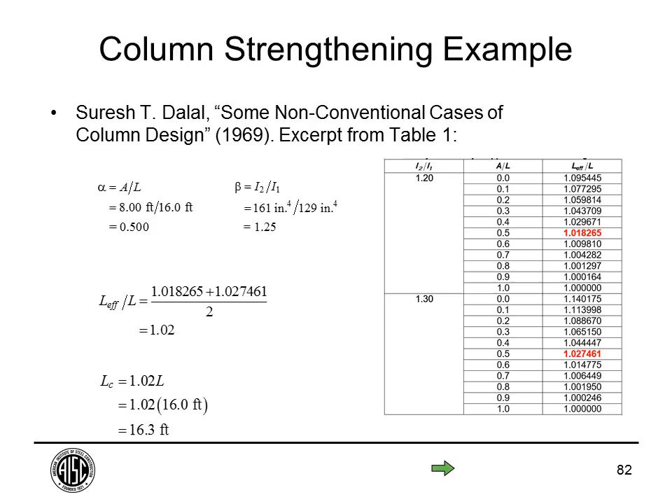So just quickly, you'll need to check two limit states. One is looking at your 16.3 foot long column using the same equations we looked at before instead of 16 feet. So if we do that, we get a strength of 563 kips, which is adequate. And then you'll also want to take a look at the unreinforced section of the column, 4 feet long. If we do that, so using the smaller section properties, but also the shorter unbraced length, we find that that's adequate as well. So basically, by reducing the length of our reinforcing plates, we've substantially reduced the amount of reinforcing and welding, and we've only reduced the strength of our reinforced column by about 1%.

So again, here's the final design. Same plates, we'll use the same weld design that we used for the full-length plates.

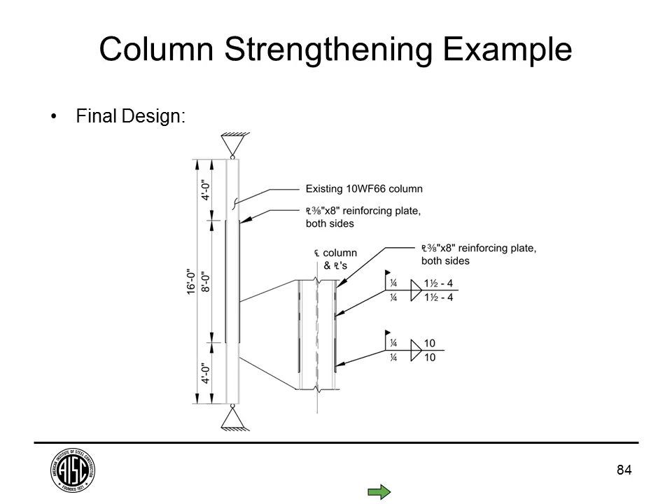So a couple other ways that you can reinforce columns. One is to encase them in concrete. This would be designed using the provisions in Chapter I of the specification. This is pretty rarely done because you'll need to have access on all four sides of the column, and encasing it in concrete will, in order to get substantial strength and provide room for the confining rebars that you need, the size of the column will grow by quite a bit. So this 10 by 10 inch column would grow to 18 inches by 18 inches.

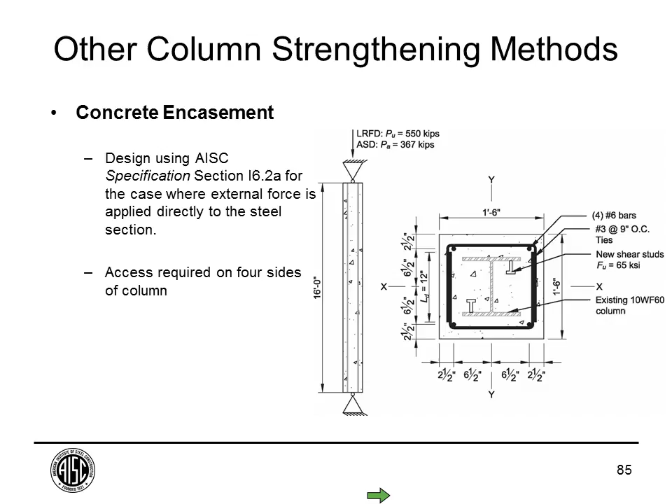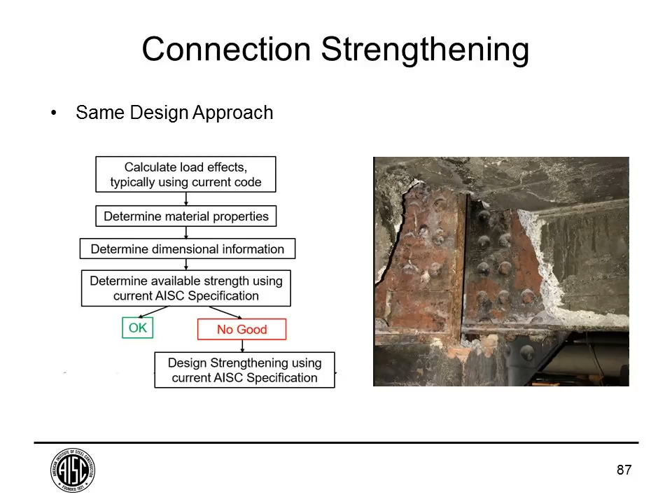So the last thing I'll talk about here for the last just 5 minutes real quick is how to evaluate and design strengthening for existing connections. So we'll use the same design procedure that we use for beams and columns. Again, we'll use the provisions of the current code in Chapter J, and from Appendix 5, we can make some conservative assumptions if we don't know the strength of the existing bolts or rivets.

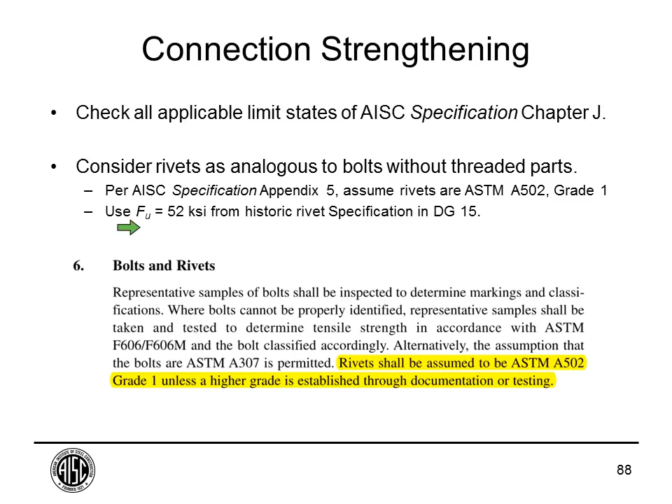So for rivets, we can assume ASTM A502 grade 1. If we look in historic steel specifications, which are available in Design Guide 15, we can find a tensile strength for those of 52 KSI, and then evaluate the rivets the same way you would evaluate a bolted connection without threaded parts.

So let's take a look at quickly evaluating and designing strengthening for this example connection here. We have a beam with double angles and 5 rivets through the web of the beam and 10 rivets to the column. So we need to evaluate all the different limit states, but the one we'll check first is rivet shear. So again, we have our tensile strength from the historic specification, and then the nominal shear strength from table J3.2 is 0.563 times that tensile strength, so we get a value of 29.3 KSI.

And then the strength of the 5 rivets in double shear, or the strength of the 10 rivets to the column in single shear, is just equal to the shear strength times the area of the bolt or rivet times the number of rivets in double shear. We get a value of 130 kips. And then apply a phi factor of 0.75, and we can see that this existing connection is pretty substantially overstressed. I won't go through it, but we'll also need to check these other limit states for the connection to see if they control. In this case, they won't. It's the rivet shear that's controlling the design.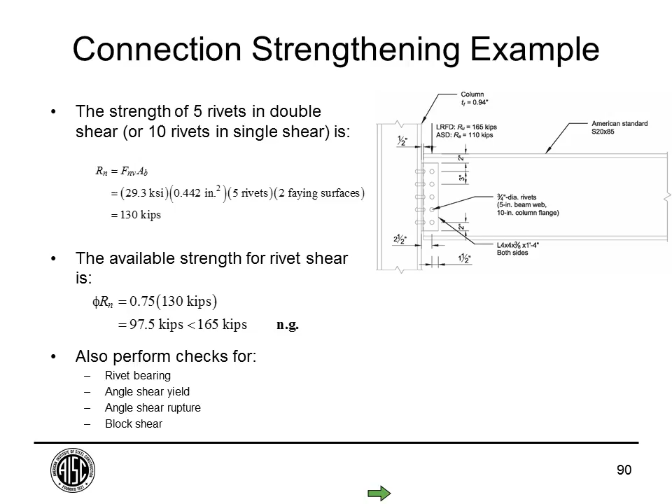So a couple different options for how you could strengthen this connection. One would be to replace the rivets with higher strength bolts. So for example, we could take out our rivets and replace them with 3/4 inch diameter A325 bolts. We can look up the strength of that directly in the tables in table 7-1 in the manual and find that retrofit would give us the required strength. So in order to do that, you chisel off the rivet head, push it out, but you have to be very careful not to damage the angle or the bolt or the rivet hole.

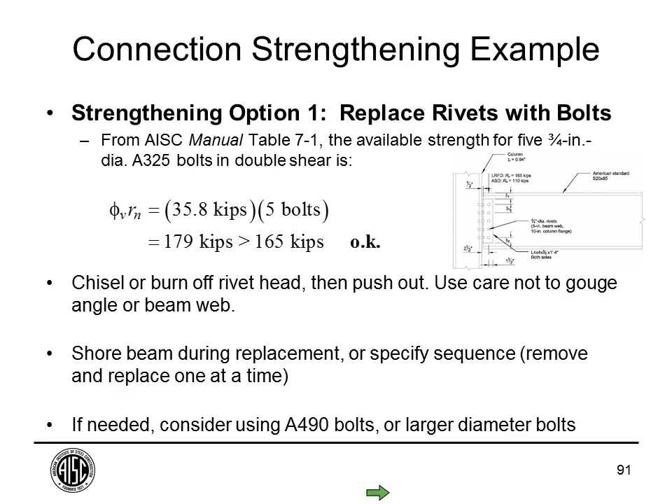So it's usually a good idea to provide shoring when you're doing this kind of work, because there can be some deformation of the connection. If you have enough strength, with say if we have a 5 rivet connection here, if 4 of the rivets are adequate for the loads at the time of strengthening, you could eliminate the shoring and potentially specify that the rivets be replaced one by one. And if replacing with A325 bolts isn't adequate, you could look at using higher strength bolts, A490 bolts, or larger diameter bolts, where you'd need to increase the size of the existing bolt holes.

Another option is to replace only some of the rivets. If you had a connection that didn't need to be strengthened by quite as much, you could replace only some of the rivets with slip critical bolts. Section J1.10 in the specification allows you to share loads between existing rivets and new bolts that are tightened to slip critical criteria.

Another option for strengthening existing connections is to add welds. So this is addressed specifically in section J1.9, where it says that if you have an existing riveted connection, you're allowed to design the welds that are used to reinforce that connection only for the added strength or the required additional strength. And the welds have to be able to provide the additional required strength, but not less than 25% of the required strength. So typically when we're designing new connections, we're not combining welds and bolts because of the lack of stiffness compatibility, the welds being much stiffer than the bolts.

But in this case, if you have an existing riveted connection, the existing rivets will take the load present before the reinforcing, and then you can assume that the welds, since they're much stiffer, are going to take the loads that are added after the welds are installed.

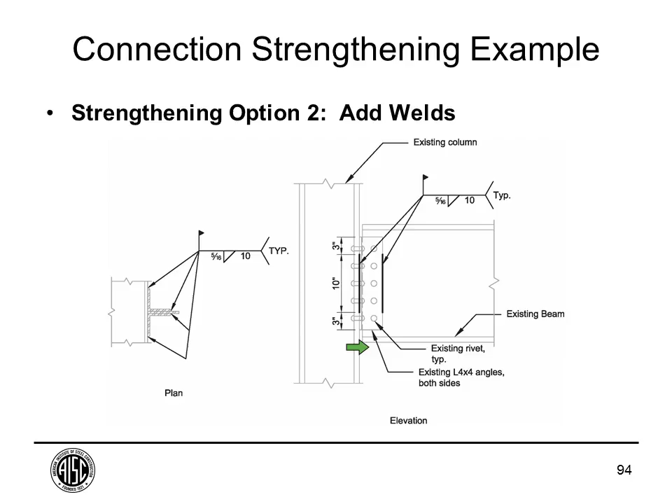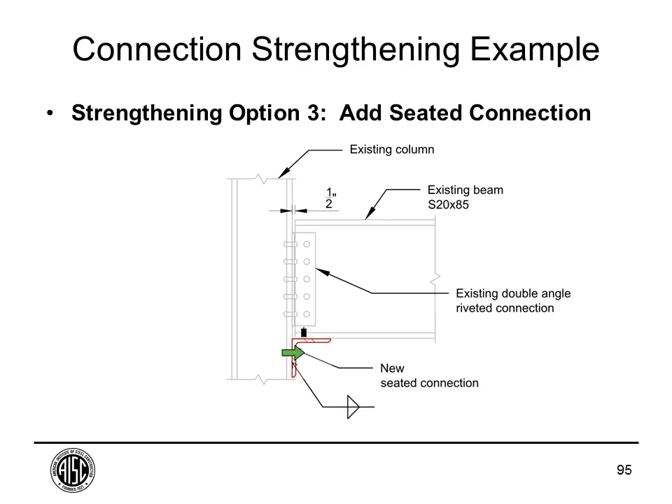And then one last method for strengthening is to try and add a seat below the existing beam, as shown here. So in general, you don't want to add an unstiffened seat because it doesn't have good stiffness compatibility. This is going to have to deform quite a bit before it can take any load from the existing connection. So if you're going to use a seat to reinforce the existing connection, you should consider using a stiffened seat, a welded stiffened seat.

So that can be done directly using the tables in the manual. So from specification section J1.9, you could design the seats for a welded seat only for the loads not present at the time of the seat installation. Because there's some uncertainty about the deformation compatibility, in this example we'll conservatively consider the full load of 165 kips. So for this example, if we consider a seat width of 4 inches and a 5/16 inch weld, we'll need a seat length of 14 inches in order to get the required strength out of the reinforced connection.

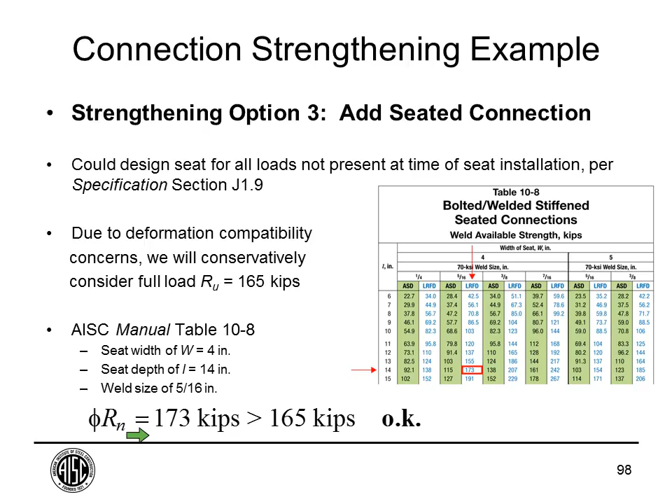So what the reinforced connection would look like is this. The detailing for this comes from manual figure 10-10B. That's where you get the geometry for this angled seat. One thing to notice is that the connection between the seat and the beam needs to be bolted, and this is to provide the needed ductility in that connection so that the connection can handle the deformations that it's going to see when the load is transferred to the seat.

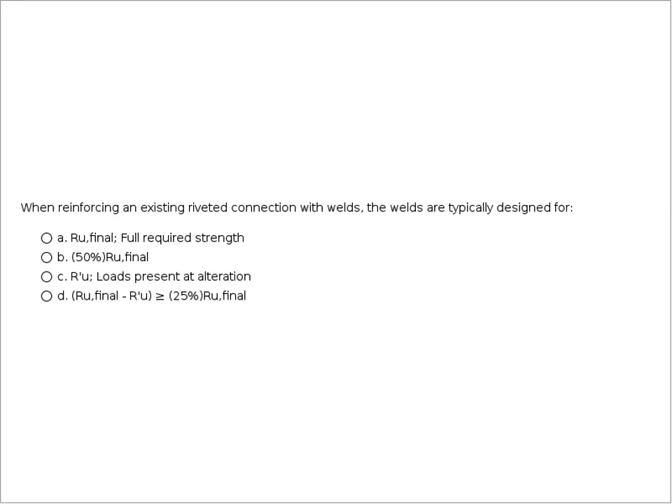Second question goes like this. When reinforcing an existing riveted connection with welds, the welds are typically designed for, is that A, the full required strength of the connection, RU final? Is it B, half of the required strength of the connection? Is it C, RU prime, the loads present at the time of alteration? Or is it D, the required strength of the connection minus the loads present at the time of alteration, but not less than 25% of the required strength of the connection? We'll give the audience just a little bit more time to get their answers submitted.

We're going to close the poll. And for this one, Joe, it looks like the audience thinks it's D. Yep, that's correct. That comes from specification section J1.9. I would say also that if you answered A, that's not incorrect. It's just conservative, but the spec allows you to design the welds only for the loads applied after the welds are installed, but not less than 25% of the required strength.

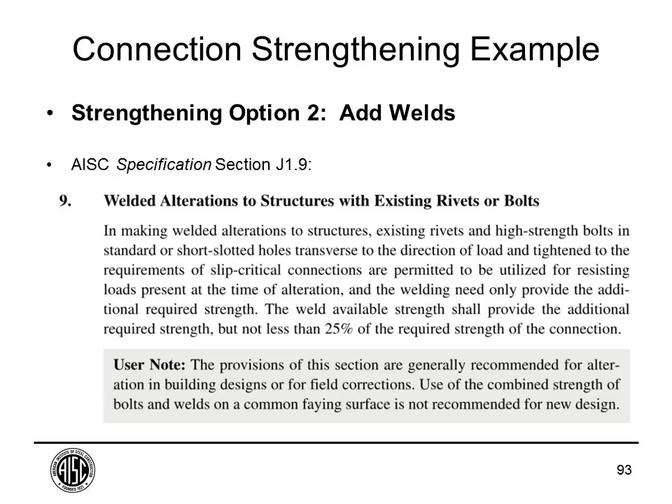All right, Joe. We'll do just a few question and answers from the audience here. The first question is on slide 22. Can you explain the required applied load magnitude for evaluation by load test? If we're determining the actual strength of the member, why wouldn't you use ASD level load?

Yeah, so if you're doing a load test, you want to make sure that you have your factor of safety. So the code requires you to apply the factored loads to make sure that the strength is adequate for those loads, so that in the unlikely event that the structure is loaded to that level, you don't have an unsafe condition.

Okay, thank you. Next question comes on slide 39. And the question is this: is it a requirement to use the current AISC specs to evaluate the strength of a member, or do we have the choice to use the 1965 code in this instance?

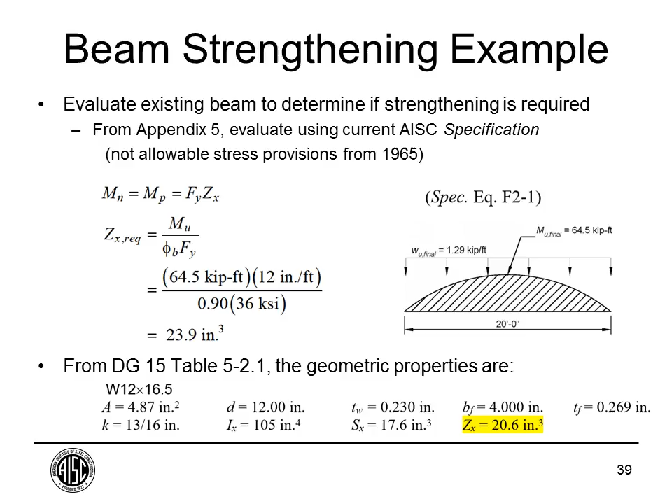So, I would say that it's not necessarily wrong to use the old code. You're probably going to get a similar or more conservative result. But if you do look at Appendix 5, the language in there I think is pretty clear that the available strength of members, this is for evaluation of existing structures, shall be determined from the applicable provisions of this specification. So again, you're probably going to get very similar or more conservative results using the older code, but Appendix 5 directs you to use the current specification.

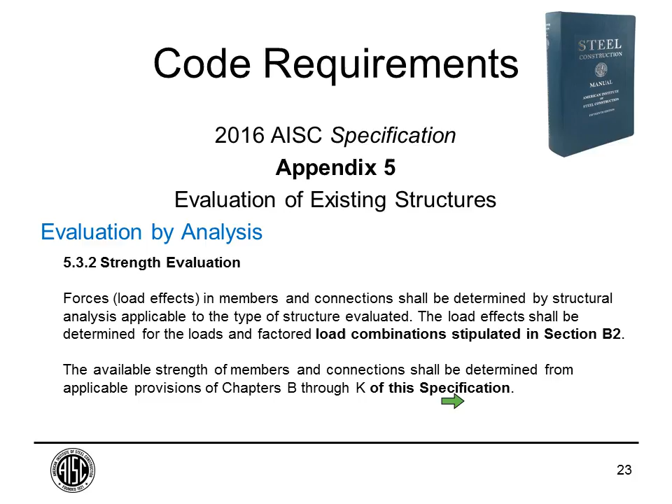Yes, it was determined using that. It's a difficult calculation to do by hand. Typically, you want to put this into a structural analysis program such as RISA or SAP. You would model a section of your beam with the lower moment of inertia, the middle section of the beam with the higher moment of inertia, and then the end section again with the lower moment of inertia, and then apply your loads and determine the deflection that way.